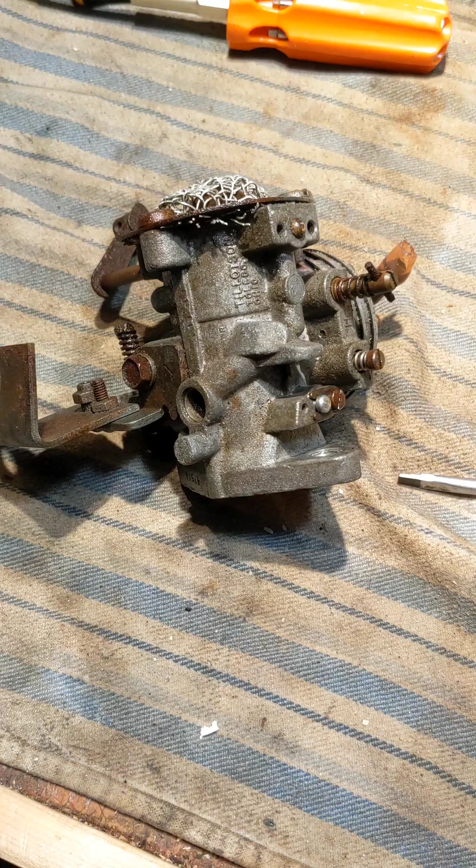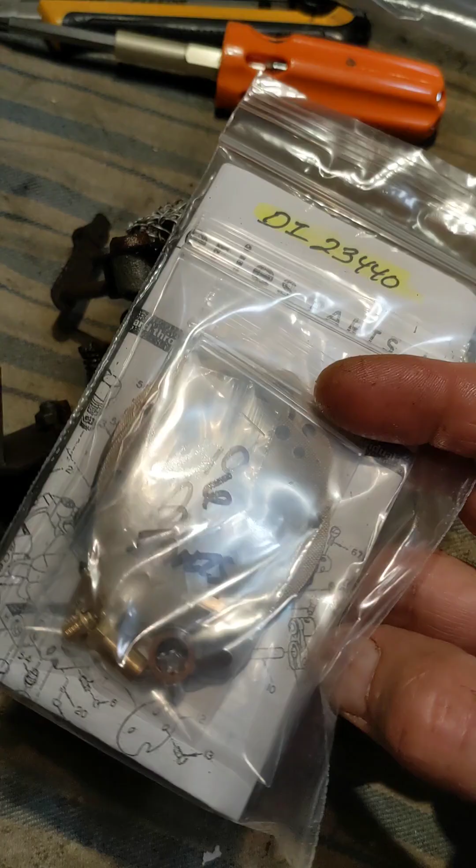Okay, we're going to start rebuilding this Tillotson carb from the Ski Whiz Massey Ferguson 300S L295 JLO engine. Tillotson carb. Got the rebuild kit here from eBay, from the parts list section. HR54A is the name of the carb. That is written on the carb right there. HR54A. We're going to start taking this thing apart.

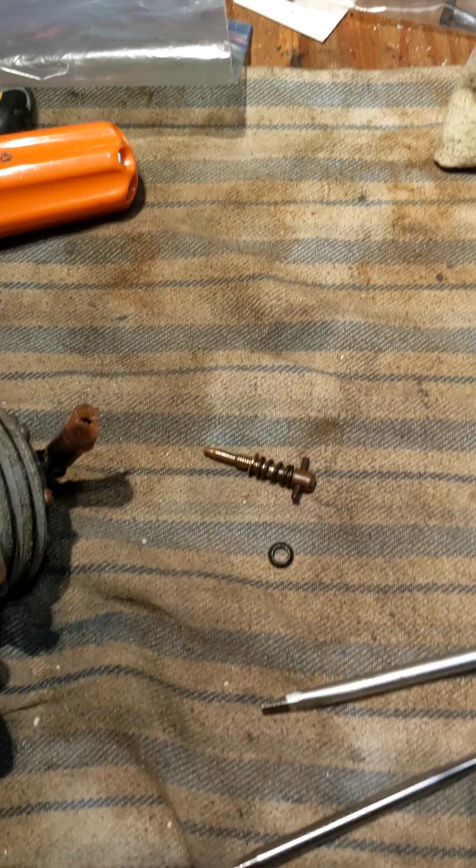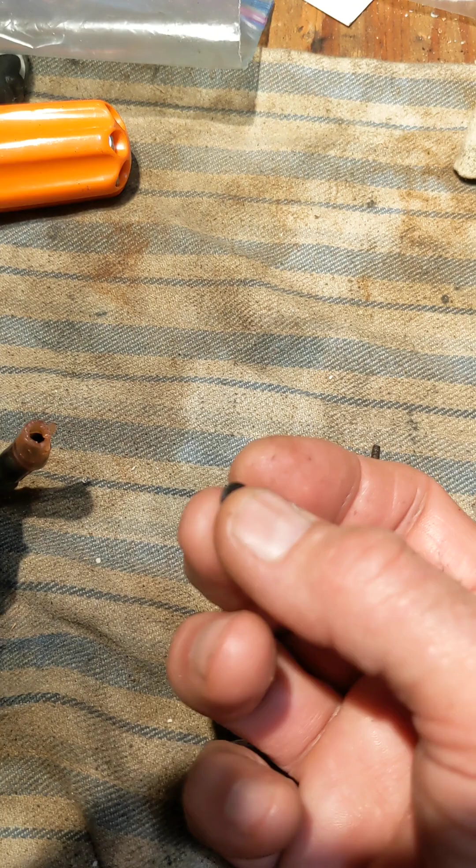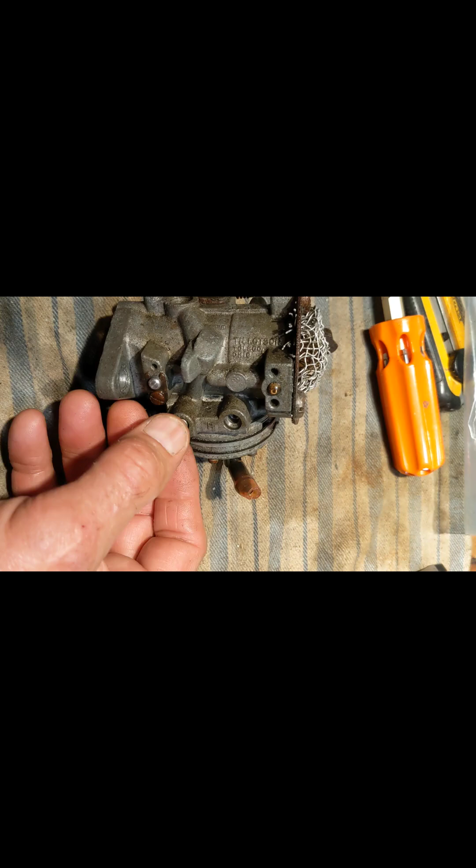First thing I'm doing is taking out these screws. So this little screw here has a spring on it. It's also got a washer right there, and it had a little O-ring. The O-ring on one side is concave as opposed to square, and the concave side was down. So this little screw was 2.5 turns out. So again, this little screw had a spring, then a washer, then a rubber disc, and the concave side of the rubber disc was in.

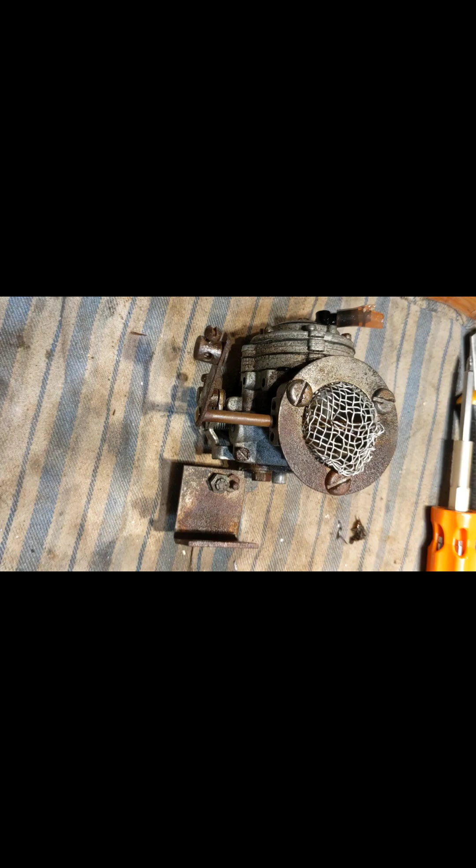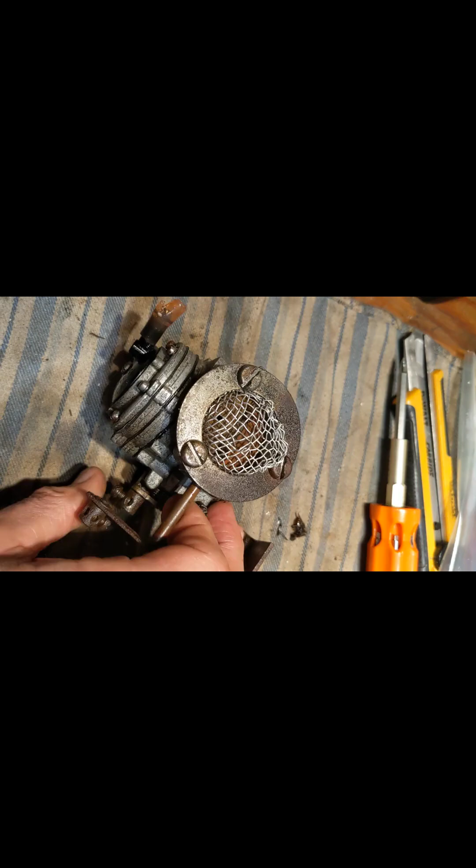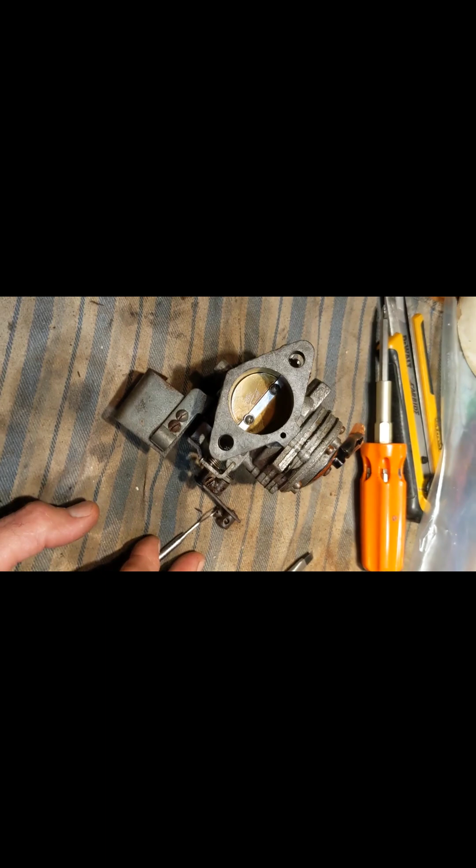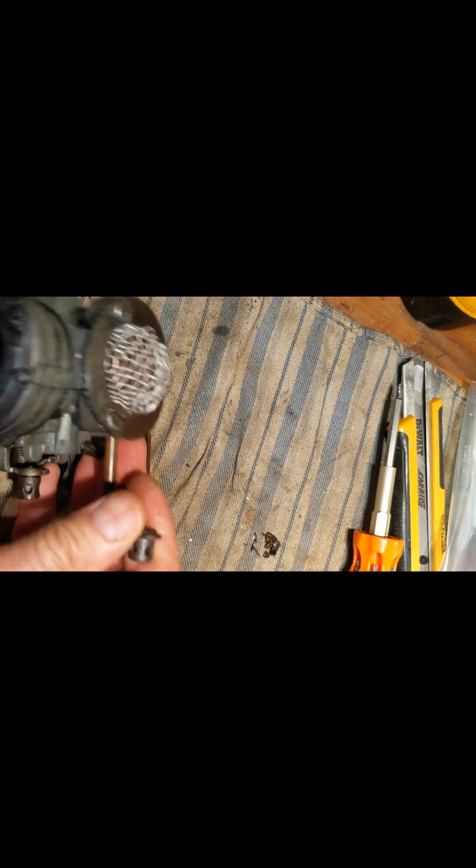Also worth mentioning about this carb, when I took it off the machine, which had been parked for 43 years in the bush, the choke was totally seized up and the throttle was totally seized up. No movement whatsoever. I soaked it in a mixture of gasoline with a bit of two-stroke oil and a bunch of penetrating oil. The throttle started to show a tiny bit of movement after like 3 days, and I could free it up, and the choke started to show a bit of movement after 4 days, and I could free it up.

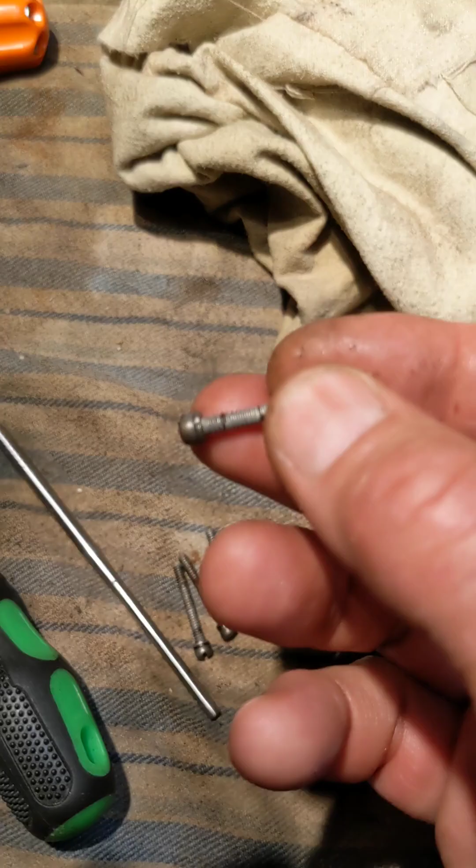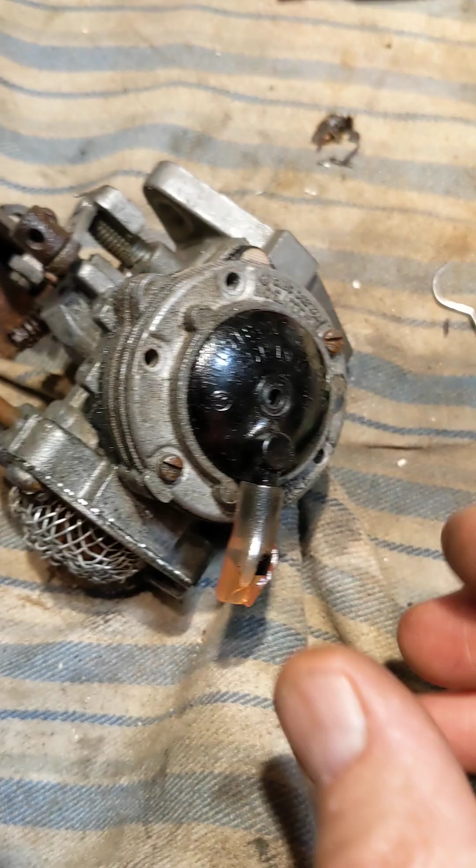Alright, so I took the 6 little screws out here, bolts on the gas line side of the carb, and they each have a little washer, and they're all the same length. Okay, actually I'm taking out this little screw in the middle here first. It was on really tight, so I put a couple more in to hold it down, but got it loose, no problem. Now I can take this little plastic thing where the fuel line attaches. And below that is a little screen here. It's like a gas filter of sorts.

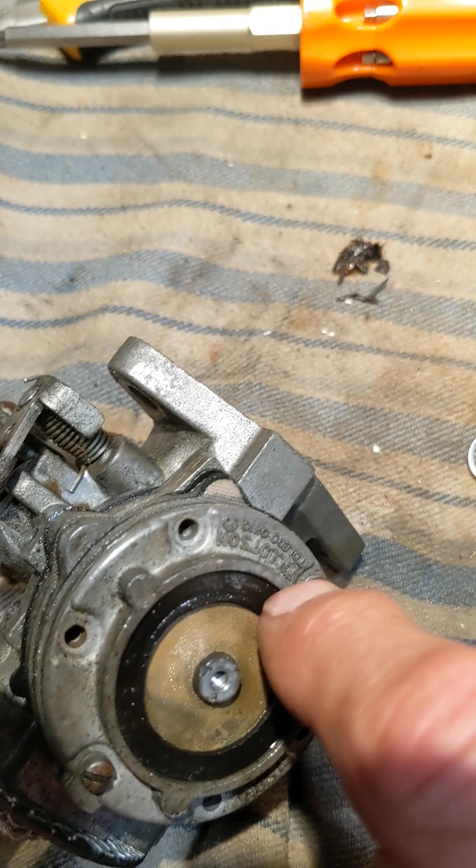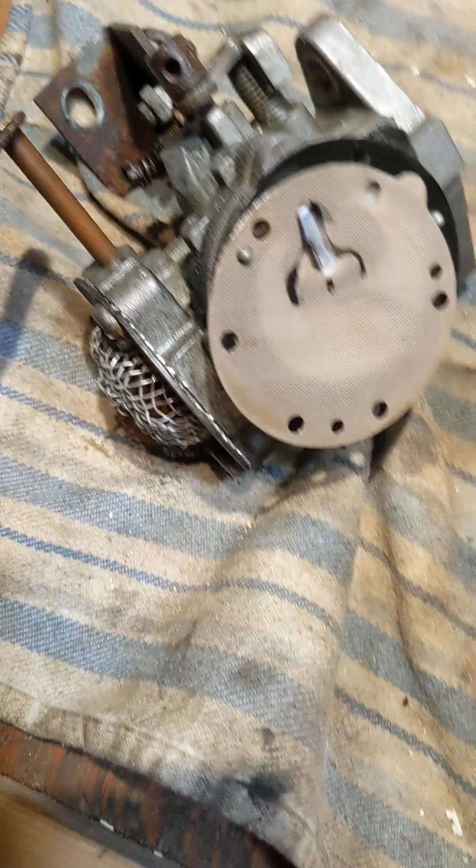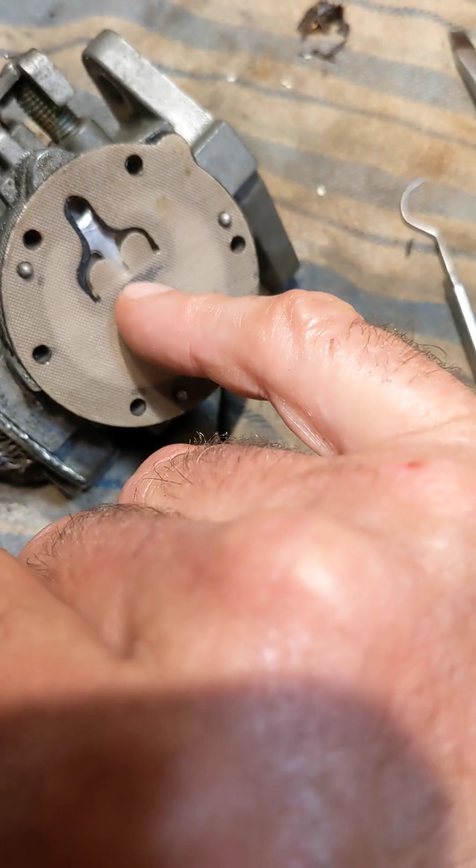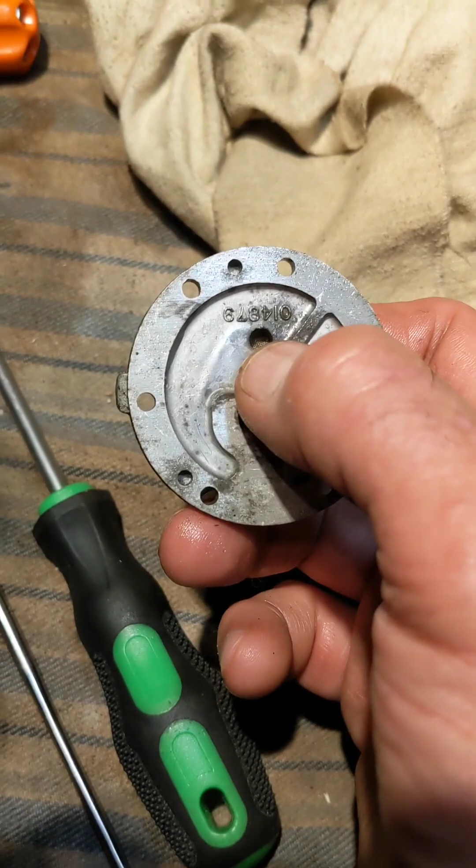Okay, now we can take this outer plate off, and notice underneath it these little filters and such, whatever they are, have little holes to guide where they go, but they also line up here, so you know how to put them on. You can see this looks almost like a piece of screen with a couple little tabs here. So here's that little plate I took off, and this is the underside. You can see a hole here where you can see the screen through the hole. A couple of other little holes here.

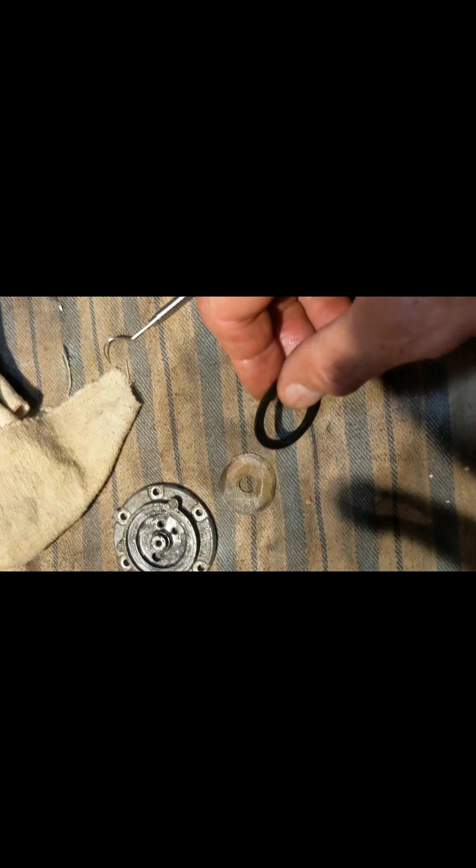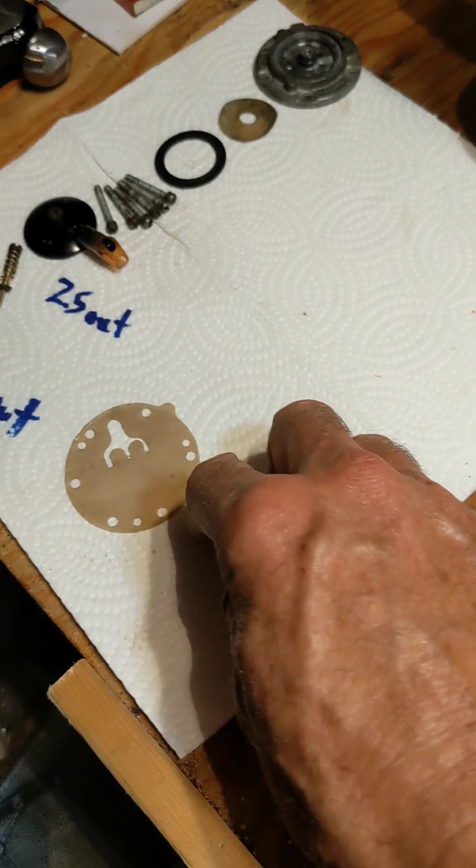So there looks like a rubber gasket here of sorts. Actually, the pieces lift out of there no problem. So there's the little gasket. Rubber gasket was to the outside. Then the screen was next. And now we're carefully going to try and lift out these various pieces here. So here's the first piece. It's like a piece of screening, almost, a piece of nylon. I'm keeping things organized over here, hopefully.

Next we have, it was almost like paper, but it's probably rubber or something. I don't know yet what comes in my rebuild kit, so I'm trying not to break anything. Okay, that's the next piece. So now we have the next piece. Instead of its little tab being over here, like the other pieces, its little tab is to the top here. Take that off. Nothing on it of interest.

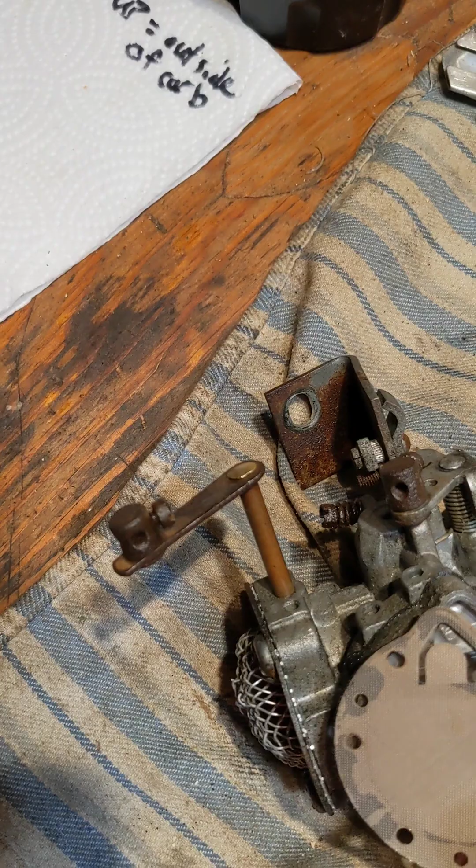Now we have another little screen here. Notice again this tab has also got that up there, unlike the other ones. So there's actually two of them here. There's the outside piece first, then another one of these sort of paper, I don't know what they are, rubber stuff is next. So now just gently pry this off. Notice this one has the little bulge at the top here, but now it's also got this right angle thing.

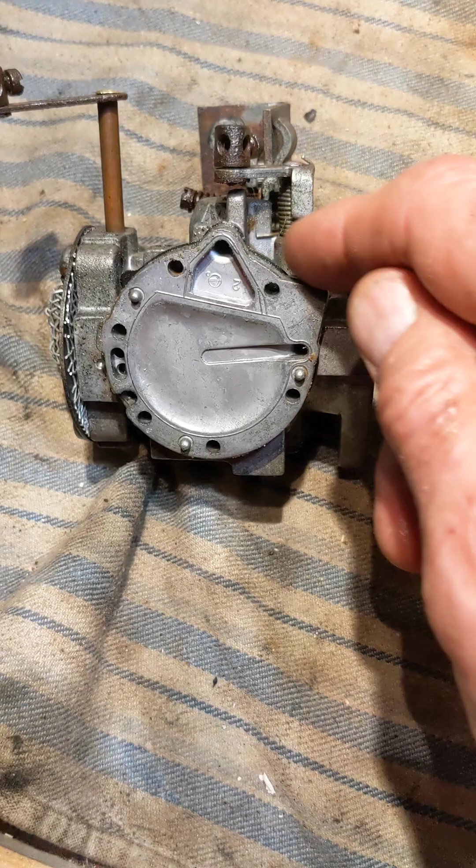Stuck to the bottom of it is this valve or pump thing. We'll get it off. So this little plate had the thing below it kind of attached to it. I just took a sharp chisel and very gently went between the two to get it away. So that one's next. Then this thing, notice that this side is toward the gas line side of the carb. It had this thing on the bottom. Doesn't appear torn. It's not all really hard, but presumably the kit comes with a new one.

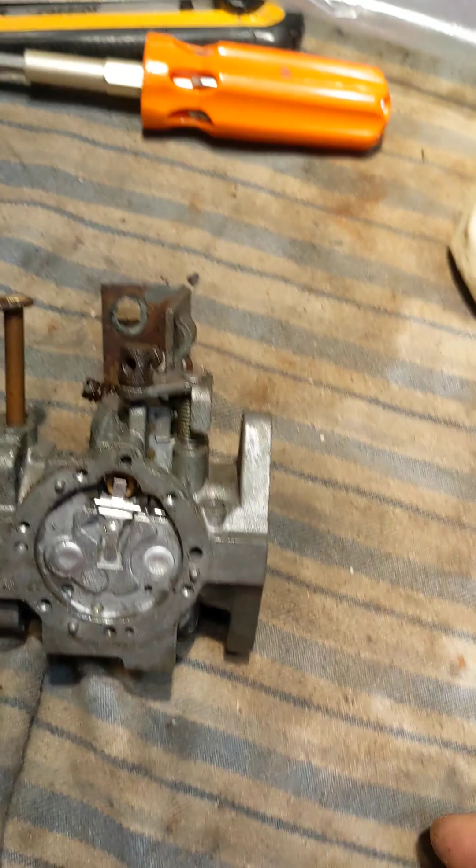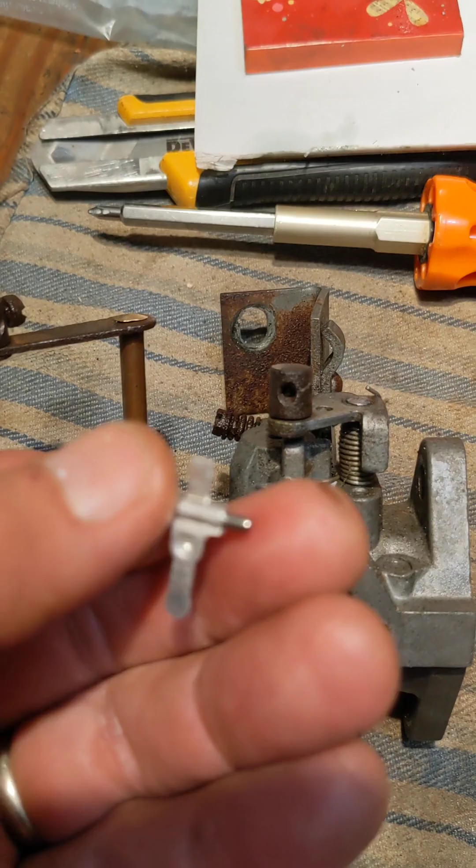Alright, now we're down to the needle and also to the Welsh plugs here. I'll take this needle off, but before I start ripping into the Welsh plugs, I want to see what is in that kit. So took off that screw, no problem. Here's the little thing, and it's got this little pin thing loose inside it, and you can see there's the little spring that was underneath it. Don't want to lose that. Actually, the little needle in there was indeed loose. And the rubber tip on it seems nice and rubbery.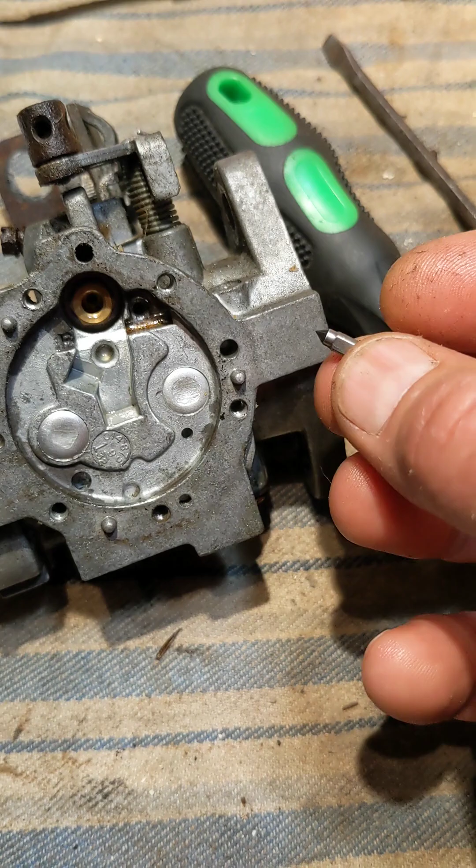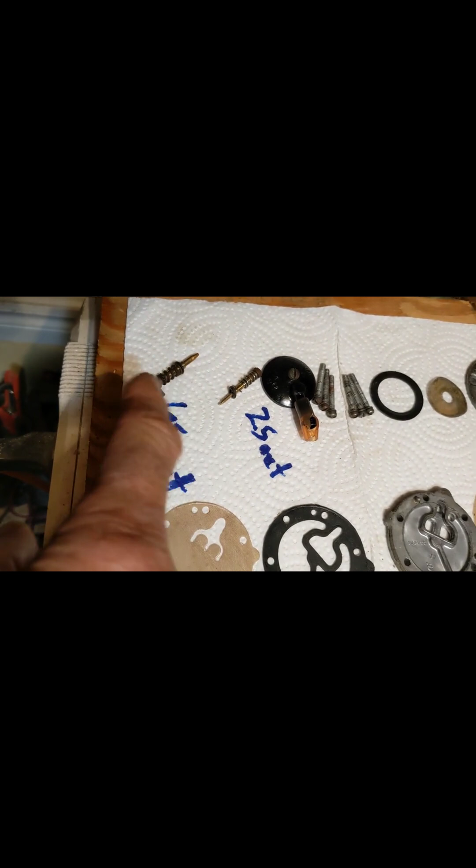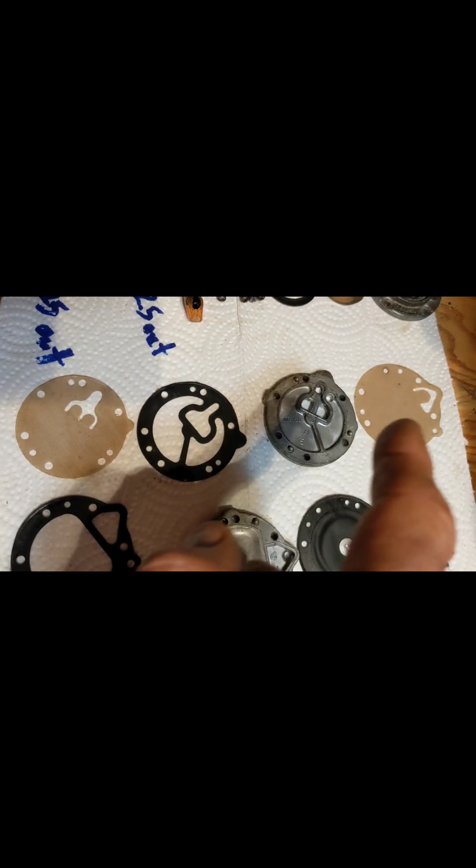So here's all our stuff laid out: the screws, I guess one's a mix, one's an idle, maybe. Fuel line in, the outermost plate, various little diaphragms and what have you. There's the diaphragm, coming finally to the needle assembly here.

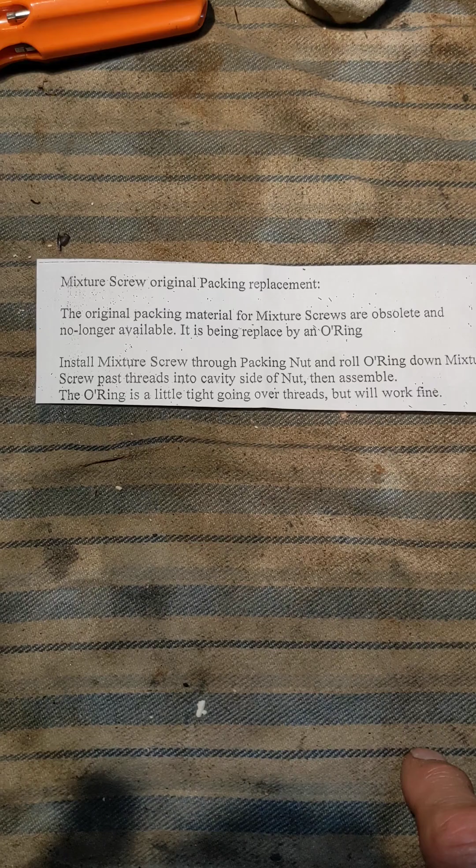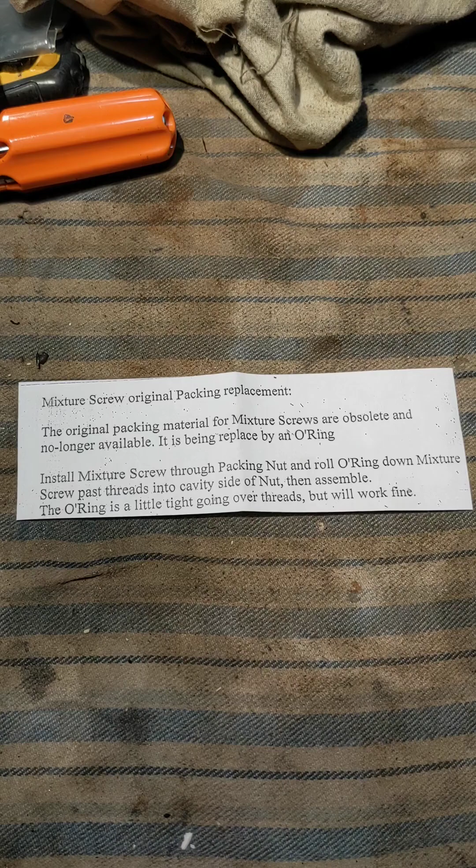So here's the little notice that came in the kit. Mixture screw, original packing replacement. The original packing material for mixture screws are obsolete and no longer available. It is being replaced by an O-ring. Install mixture screws through packing nut and roll O-ring down mixture screw, past threads into the cavity side of nut, then assemble.

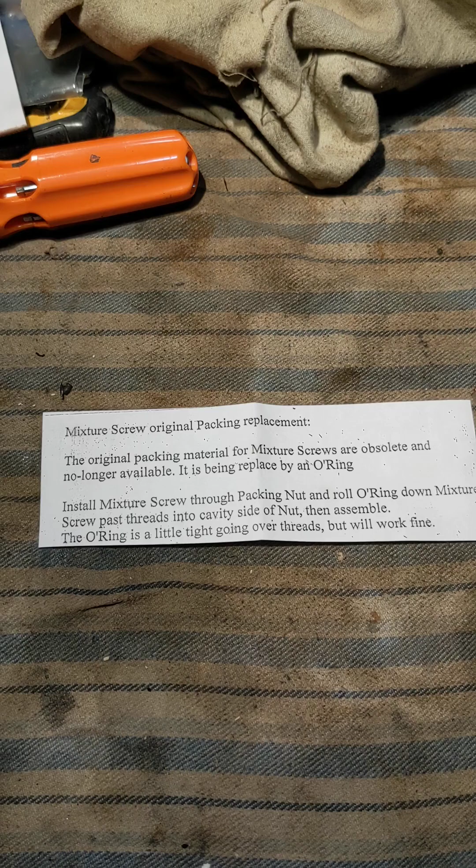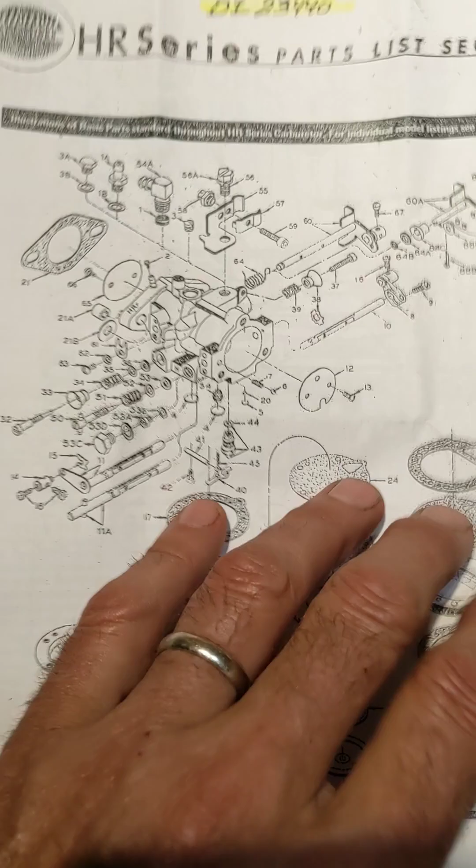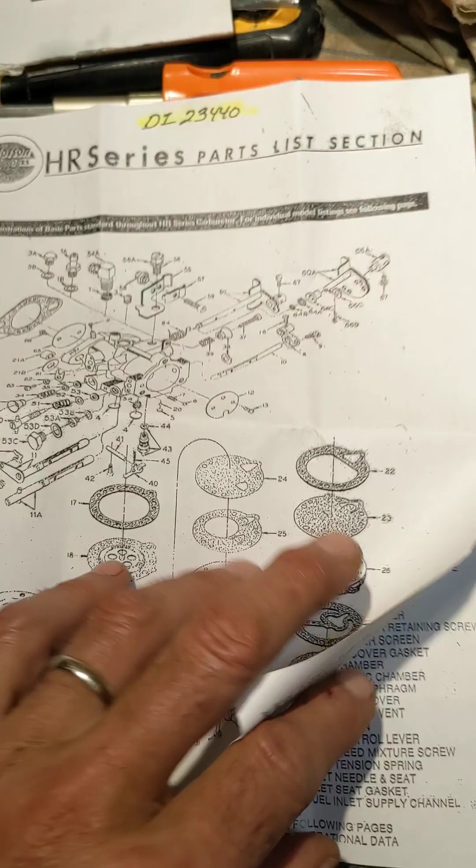I'm assuming the nut is the carb body. The O-ring's a little tight going over threads, but will work fine. So we'll be the judge of that. So the kit also came with the HR series part list section, blow up of carbs, and there's information on various parts of the carb, and the service manual, and that's it. And it's just copied from this document I could get online, Tillotson HR series.

So it looks like this first one here is the high-speed mixture screw, and this is the idle mixture screw, I believe. Yeah, you can see on the carb that the mixture screws are actually labeled. This one over here has got an L beside it, and this one here has got that H beside it right there.

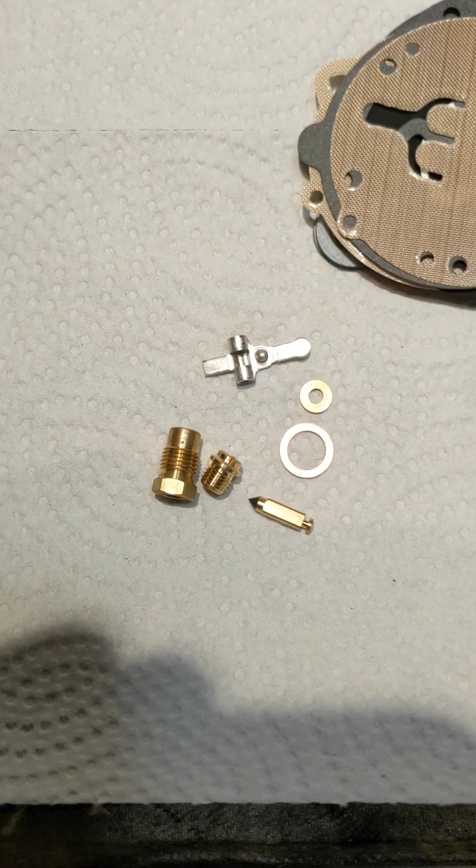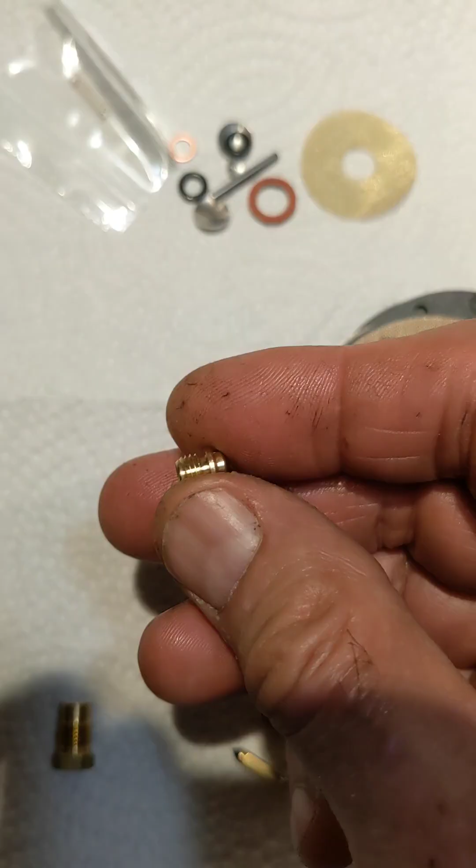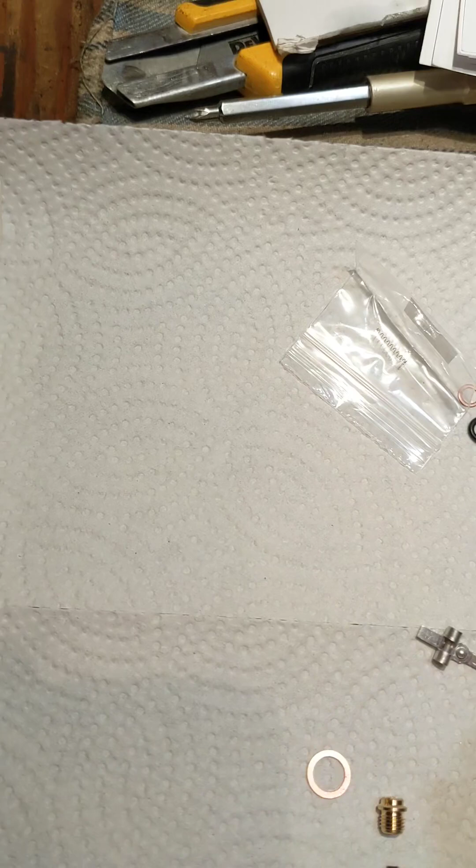So here was one bag of parts for the kit. Needle, that hex thing, the needle seat. This thing here, not clear to me what that is. We got to take the hex thing out of the carb to have a look at what's underneath it. And there's the little thing that moves the needle up and down. There's the little needle, and there's a couple of what look like copper washers. Oh, and there's also the little spring.

And there's another little bag, came with the screen, the start of the carb, where the gas comes in. What looks like a kind of a rubber washer, a little copper washer, a couple of O-rings there, and what looked like the 2 Welch plugs, and this little thing, which is almost like a Welch plug, but it's got a hole in it. That is a mystery to me.

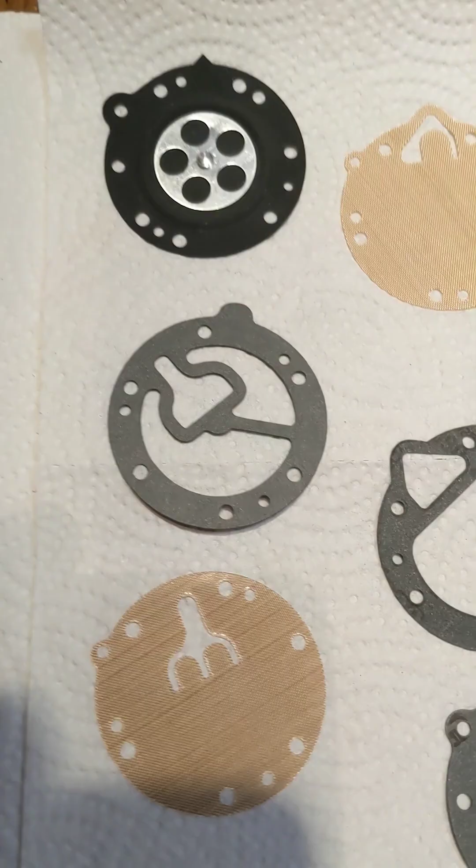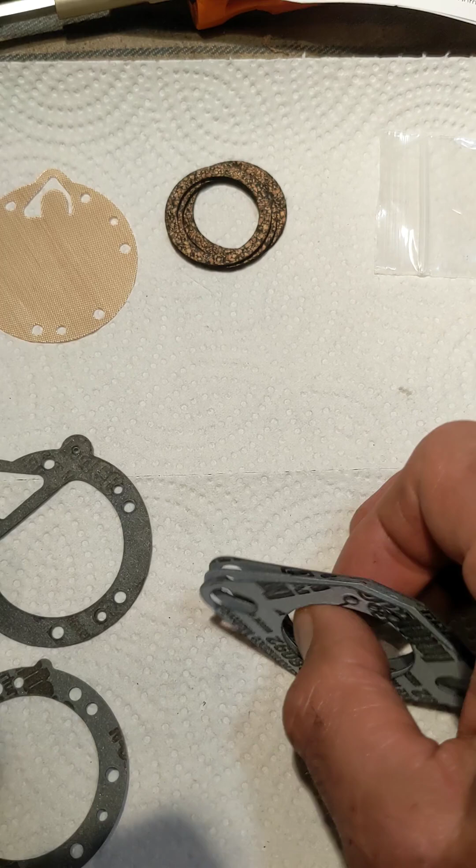Here's other stuff in the kit. One of these fiberglassy type things. This paper rubberized stuff, a nice soft new diaphragm, another fiberglassy thing. Another layer. This one here is not represented in our original carb. It's got 3 cork O-rings, not sure what they're for, and then a bunch of gaskets, 3 of them. These go between the engine and the carb.

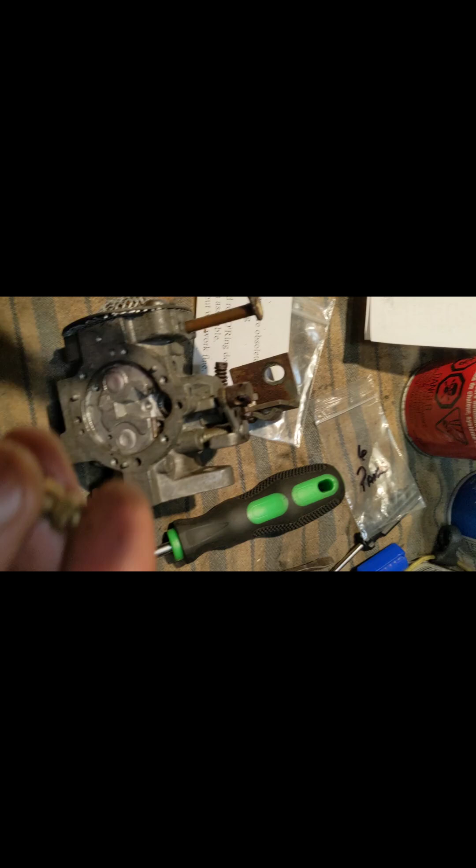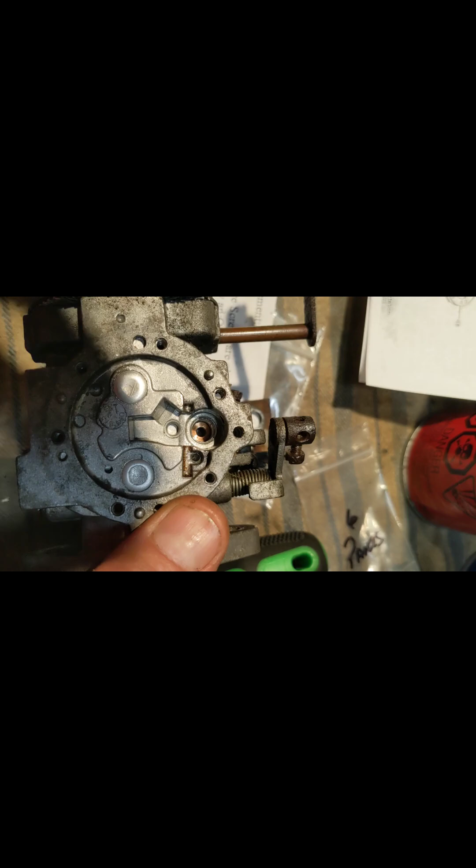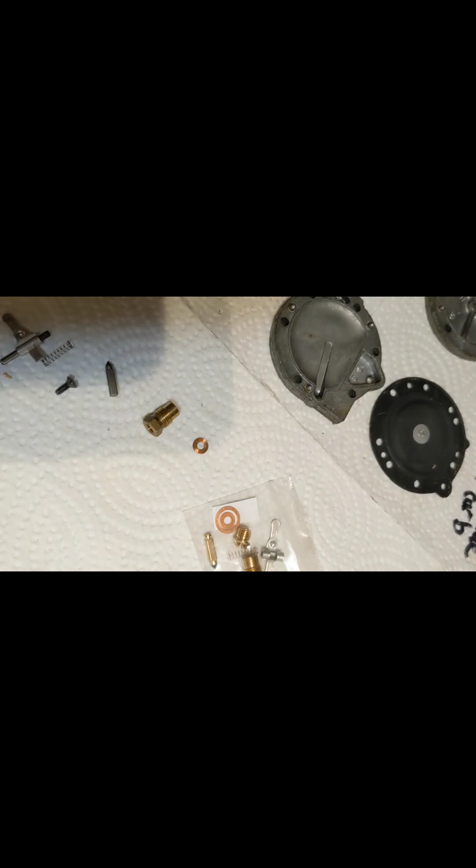So we're going to take out this little hex nut here, see what's underneath it. A 5/16 socket fits on it nicely. Not too much wiggle, so I don't know if it's supposed to be 5/16, but it appears it'll work no problem. So that little hex nut came out no problem with the 5/16, and underneath it looks like there's a copper washer. We're going to see if we can pick that out. Yep, underneath that little hex thing, there was this little copper washer, and it came out, it's loose in there. Don't see anything underneath that though.

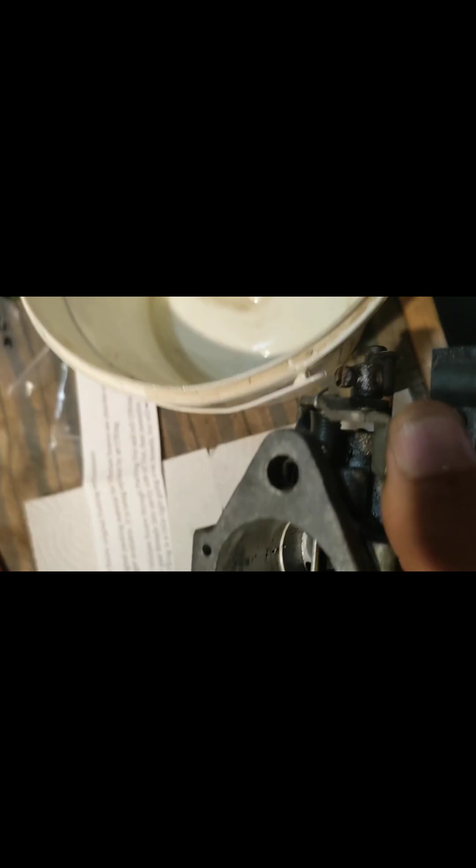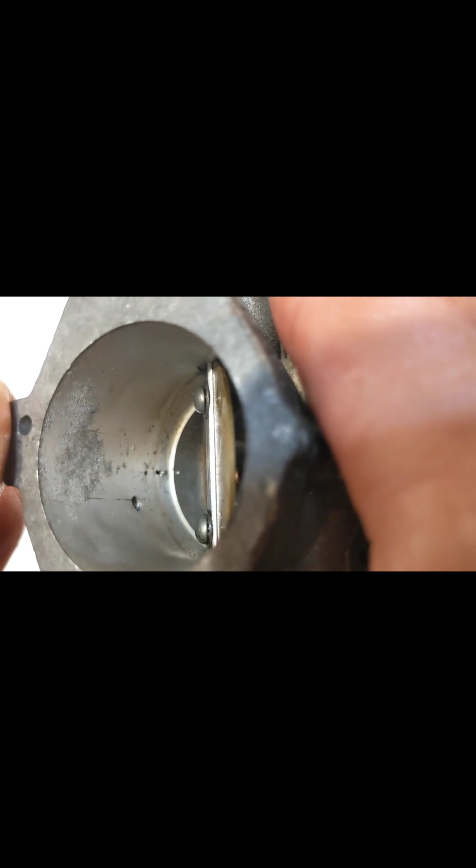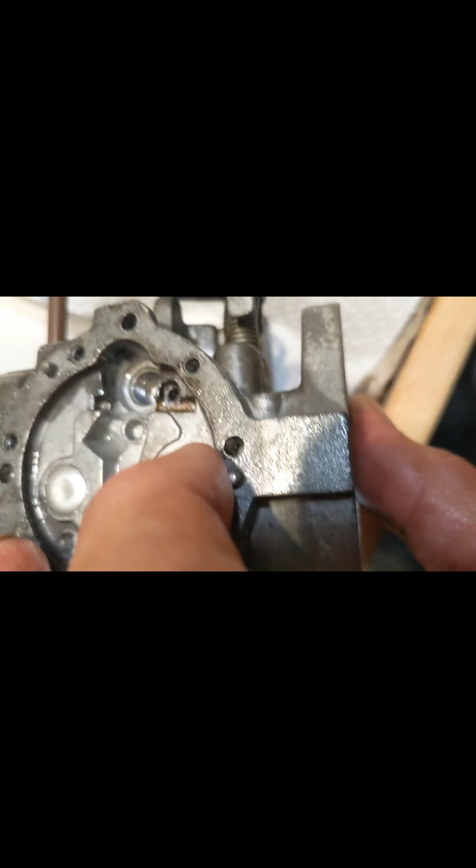So, just looking at this carburetor here, this is the throttle side, throttle plate right there. There's a round hole about an inch down. But then there's another little hole that sits right under the furthest away edge of the throttle plate from here. You can see that little hole there. I wonder if someone punched that through the carburetor. It doesn't look machined. It looks ragged. I wonder if someone, when they did this Welch plug on this side, poked that hole through, don't know.

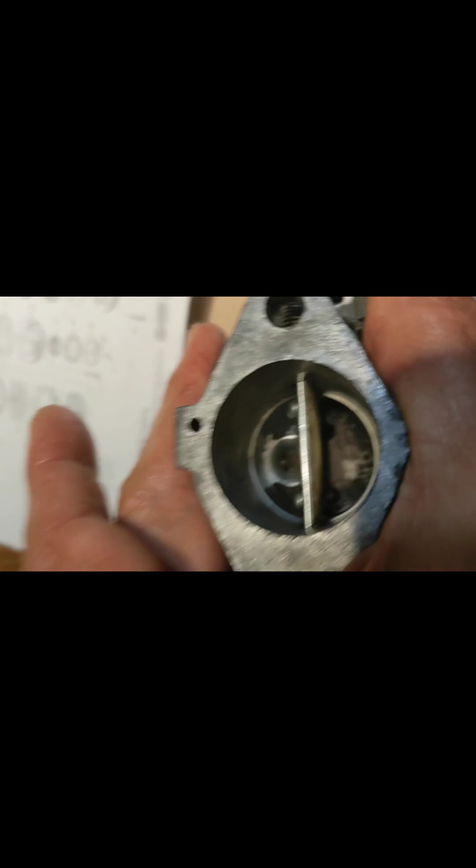And then this Welch plug on this side, I don't know if you can see down in there, there's sort of a Venturi type thing. It looks like there's a jet, like a brass thing there, below this Welch plug here. I blew through various passages with carb cleaner. Anyway, that hole there, no, I don't like the looks of that. It's not supposed to be there, I don't think.

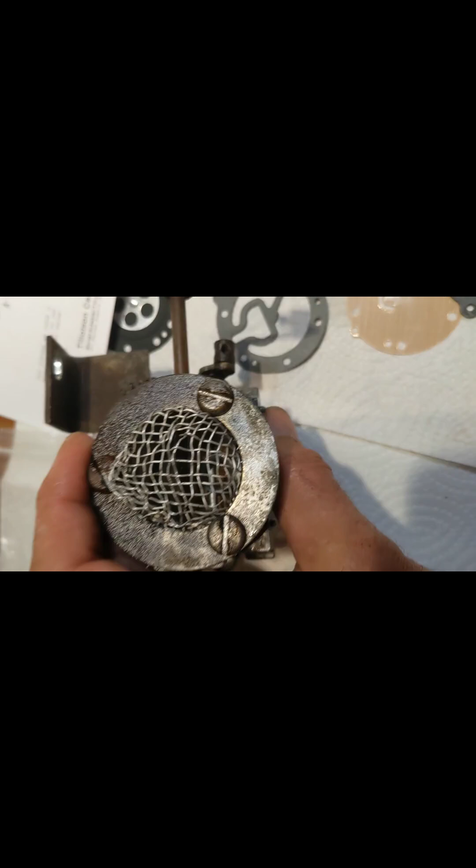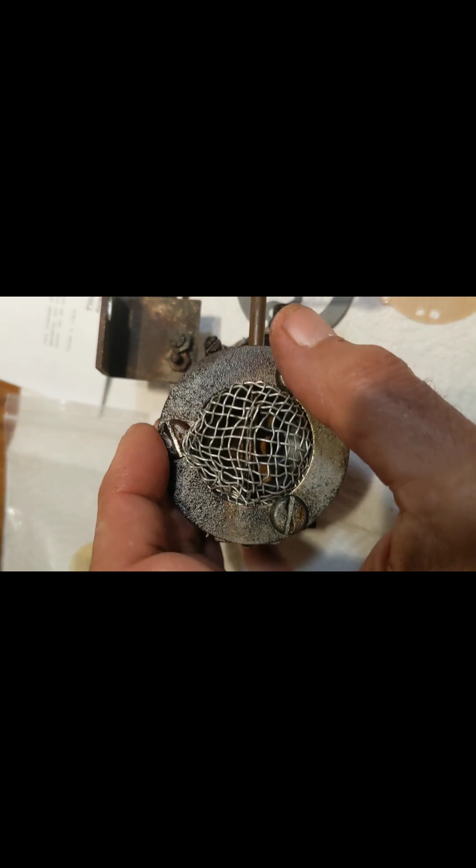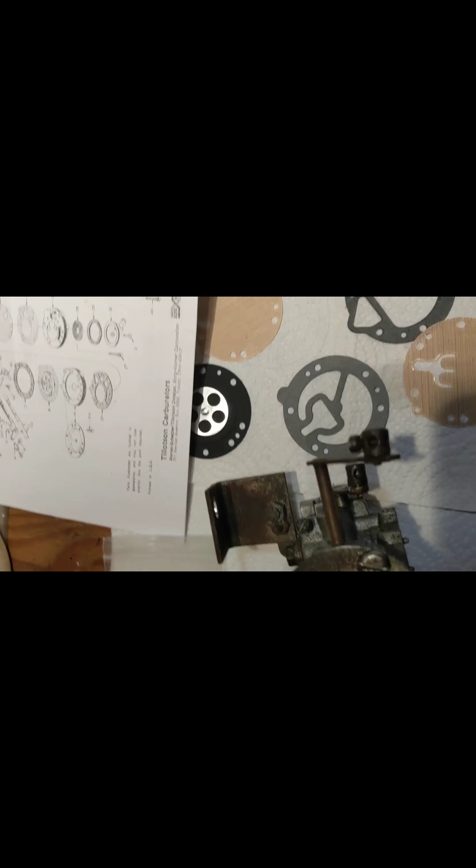This side here, the air intake side, it's got this old beat up screen on it. These bolts seem to be very tight, so I was wondering if I could get away without taking that off at all. Doesn't look like there's anything there much except for the chokes underneath it. So I think I'll leave well enough alone there, but a bit concerned about that hole. Wondering what you guys think, if that's going to be problematic.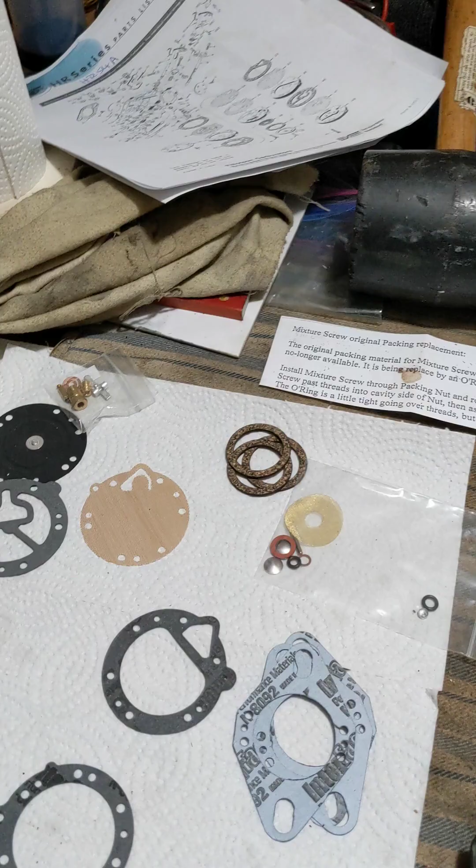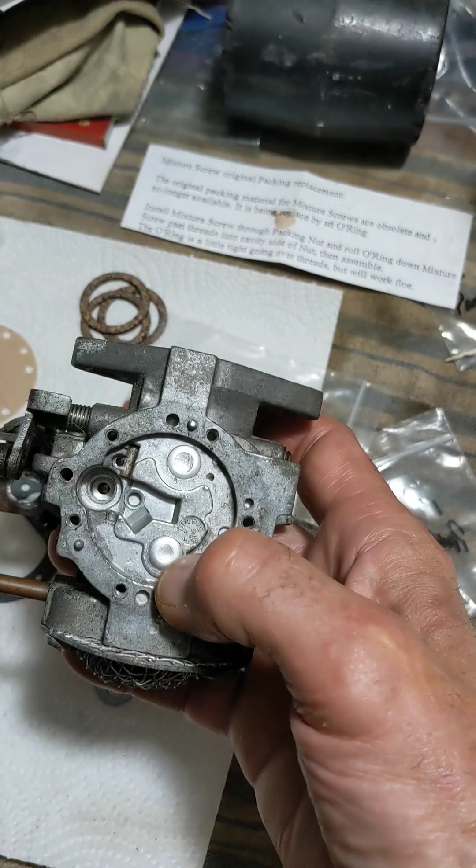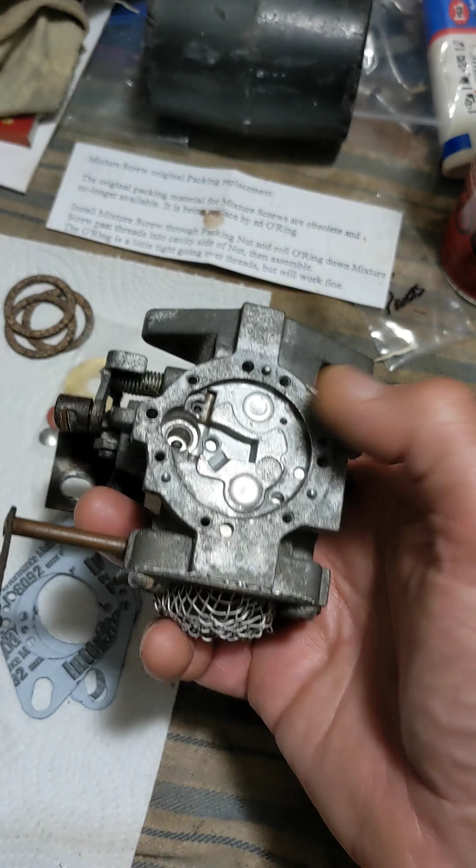Well, I was looking at the instructions, and they don't recommend doing the Welsh plugs because they rarely get screwed up. I can hear the little check valve inside there. It's moving freely, plus I can blow out the passages. Seems alright. So I think I'll try putting it back together without changing anything there. See how it works.

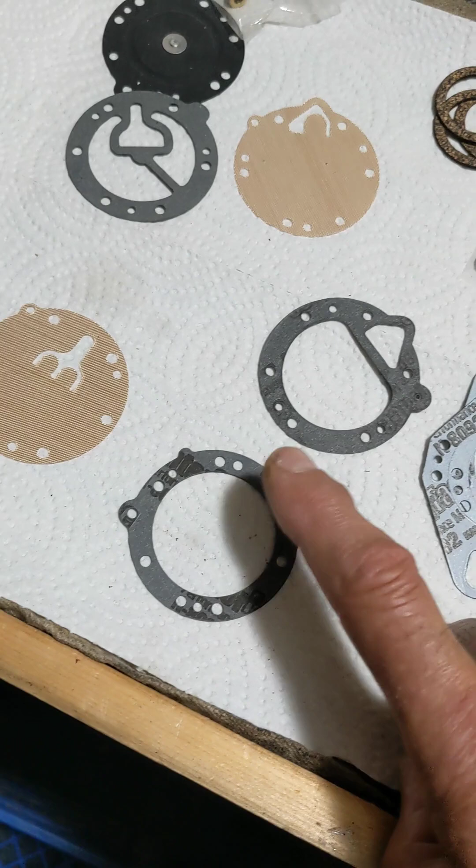Also, this gasket here is in the kit. This gasket was not in the carb, which is over there. So I will be putting it where it belongs. I assume whoever rebuilt the carb last time for some reason did not put in that gasket, which is supposed to be there.